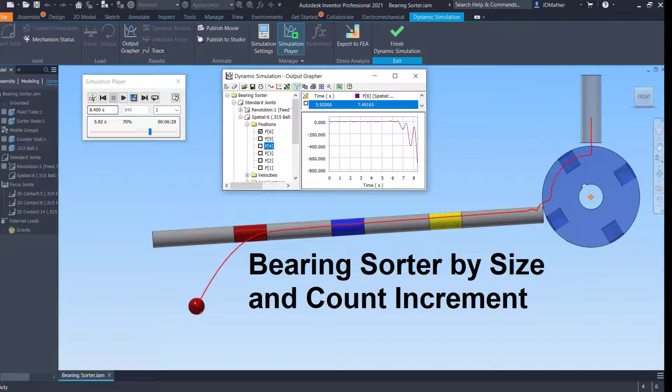Start a new metric part file, and then I'm going to go ahead and save this file, and I'm going to call it bearing sorter master. We're going to do a multi-body solid where we put several parts within a single part file, and we'll push that out to an assembly.

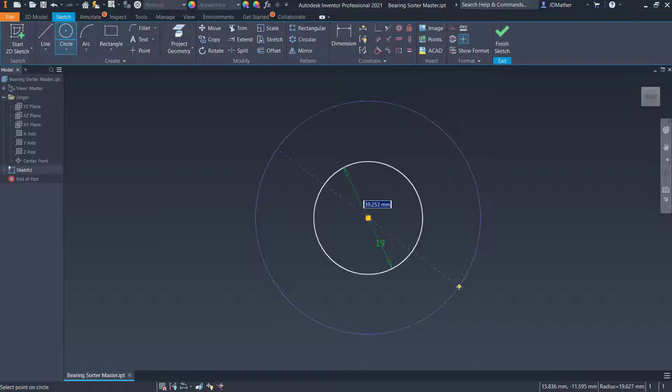I'm going to start a new sketch on the XY plane, and I will draw a circle with a diameter of 19 millimeters, and I'll draw a second circle at 76 millimeters. Then I'm going to draw a line from the origin up to the 12 o'clock position, and I will do a center point rectangle at this 12 o'clock position, making the width 3 millimeters and the height equal to the width.

So far all of this geometry is fully defined. I am then going to draw a construction line from this point up to the 12 o'clock position on this circle. I see it didn't turn dark, so I missed something, probably the vertical. Yes, I missed the vertical. Actually, let's do one more line.

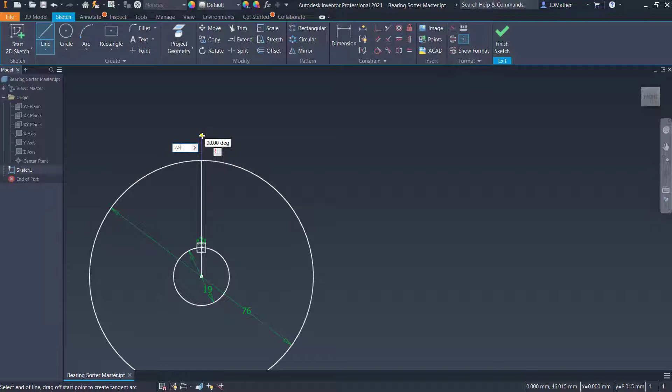So we'll do another line here, and for this line I'm going to make this 2.5 millimeters. Then I'm going to change these three lines to construction - this one, and this one to construction. And then I'm going to draw a rectangle, and I'll do this as a 2-point rectangle.

Let's do this as a construction rectangle, from here over to that, and I want this line in the center to be a center line type, so I'll have it as a construction center line. I'm going to dimension the diametral dimension from here to here as 13.2.

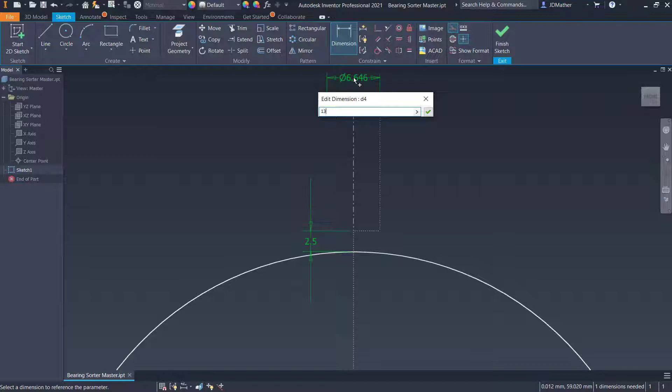I will dimension the height of this as 50 millimeters, and then I'm going to draw another rectangle, this one as an object line rectangle, from here, and I'll drag this point up to here, and dimension the distance from here to here as 1.5.

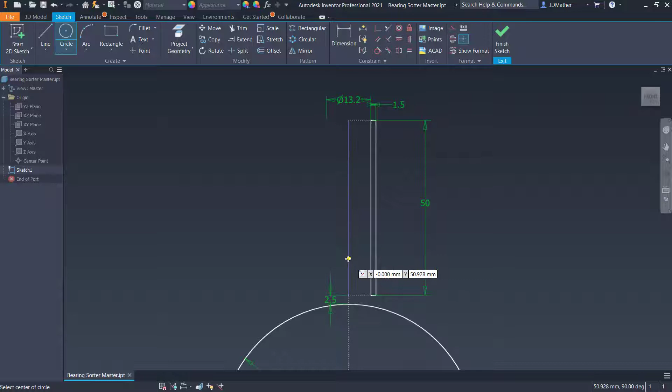And we're going to revolve this as a tube. Alright, I'm going to now draw a circle on this line, and I want it to come down to this point right here. Then I'm going to trim off half of this circle, but before I do that, let's go ahead and dimension this.

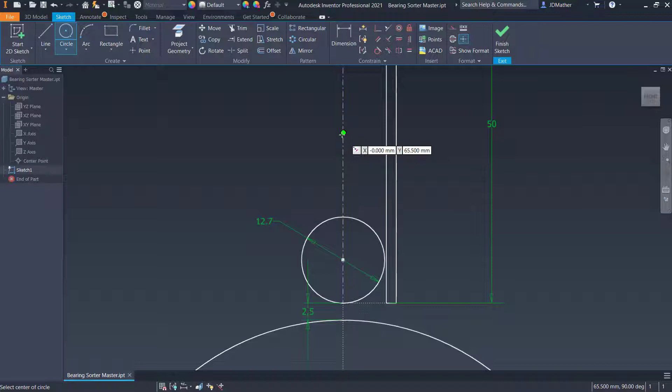So I'm going to dimension it as a diameter, and let's do this as 12.7. We see that there's a little bit of clearance between here and here. I'll draw another circle, and be careful you don't get the midpoint of this line - any place on this line except for the midpoint - and I want it tangent to this circle.

Now, it may or may not put that tangent in. It looks like I'll have to add that tangent, and then I will dimension the diameter of this circle as 13, and I'll draw one more circle.

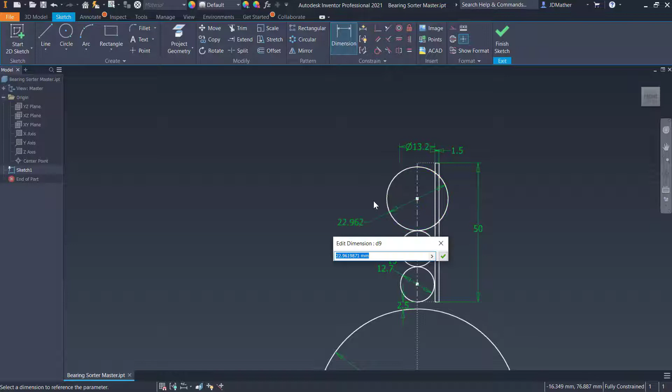I'm going to do this circle from here, and I want it tangent to this circle, and then dimension this circle as 12.4. So I made this one 0.3 less than this one, and this one 0.3 less than that one. So I have 3 different sizes, and I intentionally put those in alternate order rather than from smallest to largest or largest to smallest.

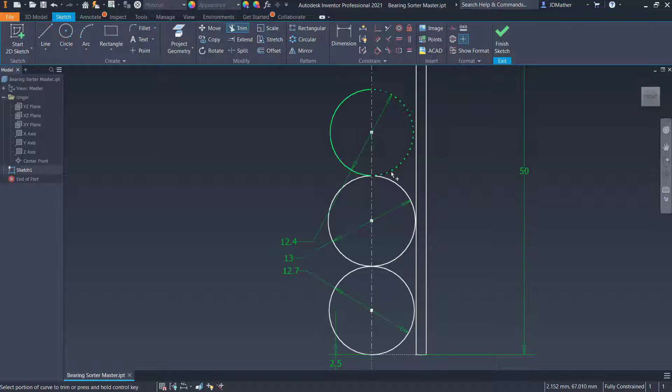I'm going to trim off one side of these arcs. Now, we don't really have to do this step, but I'm going to trim off one side of those arcs, and change this to an object line, so it will be an object center line. Then we're ready to start making some geometry with these sketches.

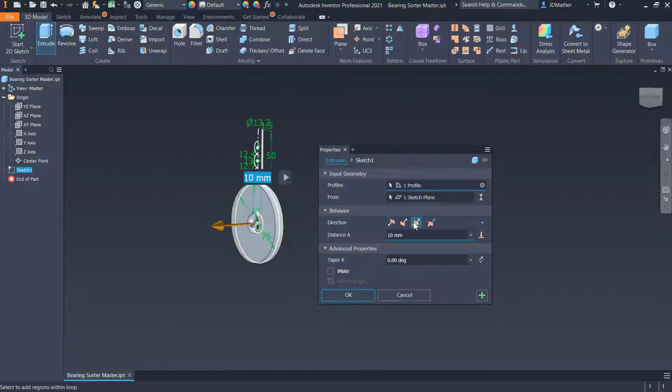I'm going to say finish sketch, and I'm going to do extrude, selecting this area minus the keyway. I'm going to go symmetric, and let's do this at a distance of 10 millimeters.

I want to put a plane up here at the tangent point, and there's several different ways I can do that - I'm going to do it this way. I'll turn on the visibility of that previous sketch, and do a plane at this point perpendicular to this line. Alright, let's hide that sketch for a minute, and I'm going to put a hole into this part, so I'm going to do a new sketch, and I have the origin projected.

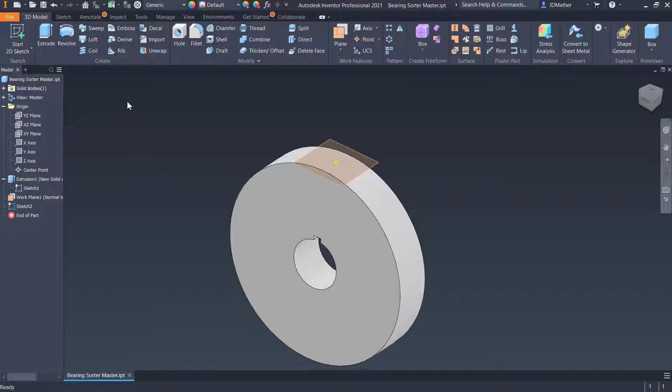That's all I want, is that origin, and I'm going to do a hole feature on this plane at this point. For the bottom of the hole I want a flat bottom hole, the diameter 13.5 millimeters, and the depth also 13.5 millimeters. We'll say okay to that.

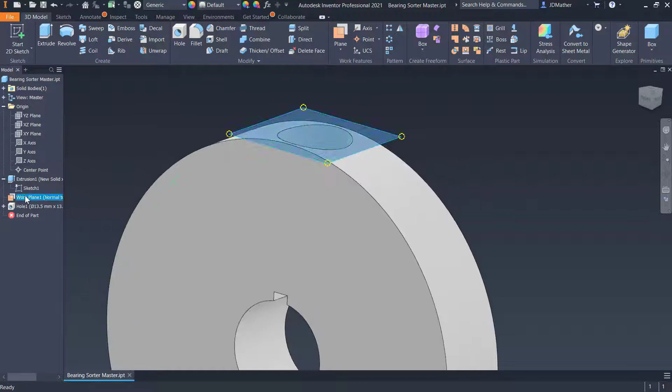Alright, so I have a hole in here. I'll turn off the visibility of this work plane, and I'm going to put a chamfer on here, but I'm going to do this two different ways. So I'll do a chamfer on here, let's do that, say 0.5 millimeters.

So we see that it puts a uniform chamfer going around this edge, but that isn't the way that the tool would really make this in the real world. So I'm going to do it more like it would show up in the real world.

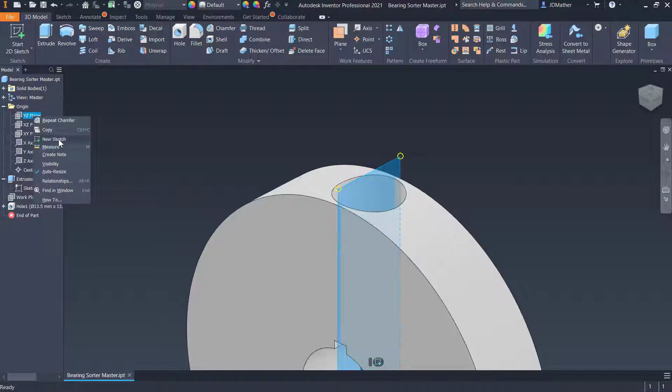I'm going to start a new sketch on the plane going through this, perpendicular to the XY plane. So I'll go to the YZ plane, do a new sketch, and project geometry this arc, then draw a line going over horizontally. In 3D it's vertical, and I'll go down at an angle and back up.

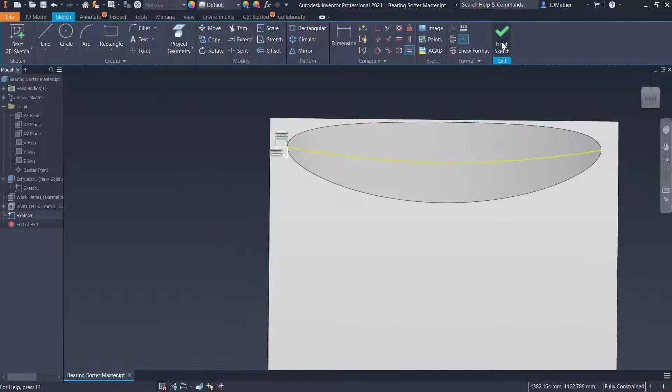Let's dimension this as 0.5, and I'm going to do equal, making this line equal to this line. It all turns dark, it's fully constrained. I'll then do revolve, revolving that around the y-axis, and put it on cut.

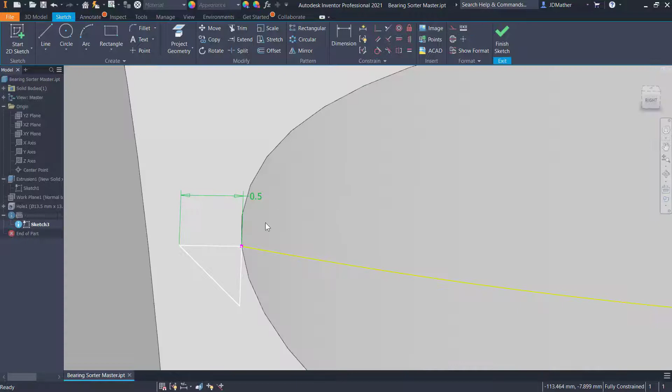Let's accept this and see if I can determine what the error was. I'm not sure why I'm getting an error. If I expand this where I see the eye, there's an issue indicated with that sketch. So I'm going to edit that sketch, and I see that this pink point indicates the projection point has been lost.

Let's hit F7 for slice graphics so we can see into our model. I'm going to delete this curve we put in here, and delete that line. It's a projected edge, so I need to delete this constraint on that point. Now this can be dragged anywhere.

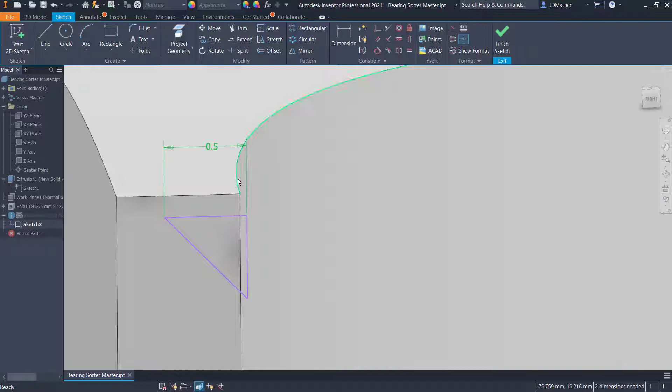Rather than project this edge, which turns into a spline, I'll do project geometry and instead get the edge of the circle, this line right here, then do coincident, this point up to here, and it turns dark again. I'll finish sketch, and it's still giving us an error, and I don't know why it doesn't like that sketch. It shouldn't be giving us that error.

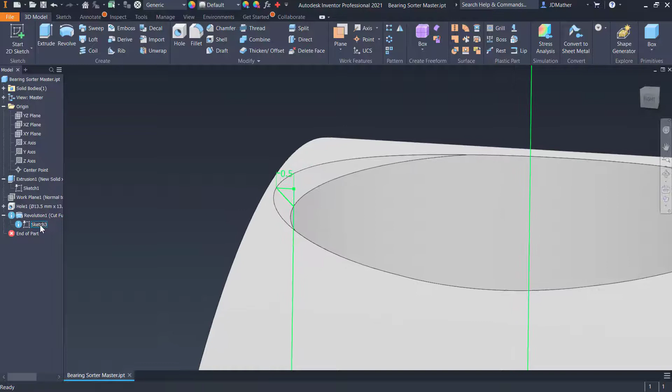So I'm going to delete this line, and delete that point, so that's free to move again. I think what I'll do is just project from the original sketch. I know that I have a dimension from here to here.

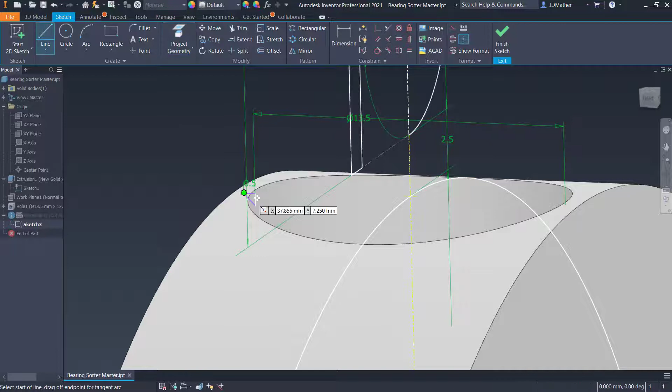Let's change this to a center line, and I'll dimension from the center line over to here. That's 13.5. Then I'll turn on the visibility of sketch 1, and project geometry this point right here, then draw a line from here over to that projected point.

If I drag this, I see that this line doesn't stay horizontal, so I'll need to put either a horizontal or vertical constraint on this. Now it's fully defined, and I can finish sketch.

So I don't know why it was giving us an error. It should not have given us that error.

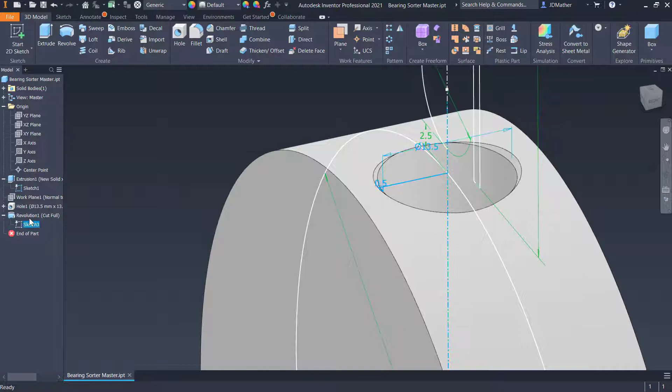I want to go a little bit bigger with my chamfer and the size of the cylinder, so I'll edit that original extrusion, and instead of 15 I'm going to do 20. On this chamfer I'll edit that sketch, and instead of 0.5 I'm going to do 1.5. We'll accept that, and that looks pretty good.

I'll save this, and then we can do the next body.

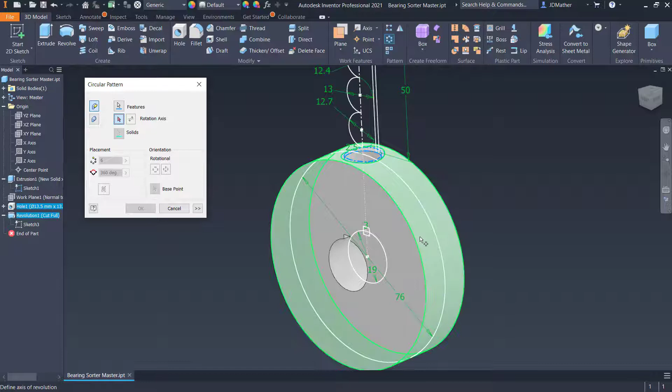I want to make 4 copies of this hole going around the disc, so I'm going to do a circular pattern, selecting the hole feature and this revolution that we used to put the chamfer on. Then I'll do it about the center of the disc, put 4 copies, and say OK. Now I have 4 holes going around the part.

I'm then going to revolve this, and when I do that, I'm going to do that as a new solid body. So right now we have one solid body, and we might go ahead and name this. I'm going to call this counter disc.

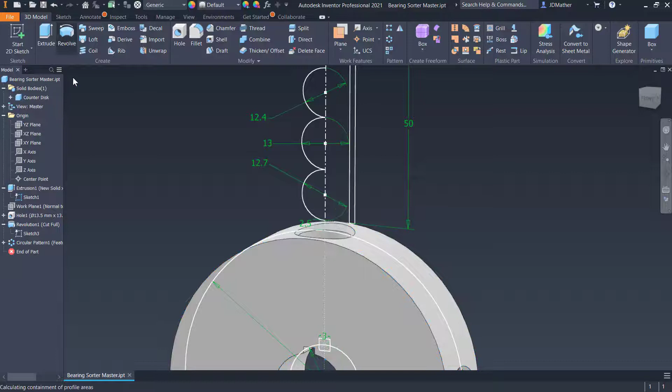Now I'm going to do revolve. I'm going to select inside of this circle, revolve about this axis, and I want to put this on a new solid. We'll go back and name this. Actually, let's go ahead and name this now. I'm going to call this 12.7 sphere, and then I'll revolve the next one.

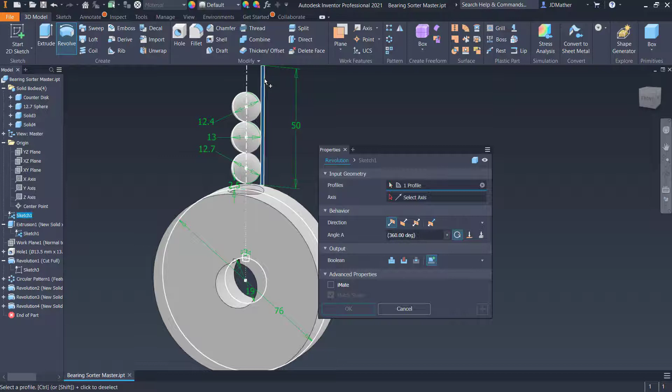I'll revolve this area about the axis, and we'll tell it new solid. I'll apply that, and then I'll get this one, revolve this about this axis, and I'll apply that. Let's go ahead and get this, and I'll revolve that about the axis, and we'll say OK to that.

Alright, let's rename the rest of these. So I will name this one as 13 sphere. I'll name this one 12.4, and I'll rename this as tube. Let's call it feed tube.

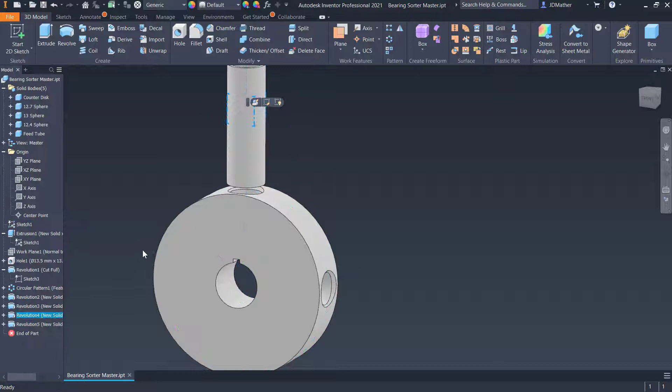I'll turn off the visibility of the sketch, and I'm going to change some colors on some of these components. So on the counter disk, I'm going to set that to be clear polycarbonate so I can see through that disc. I'm going to do the same thing on the tube, the feed tube, making it polycarbonate clear.

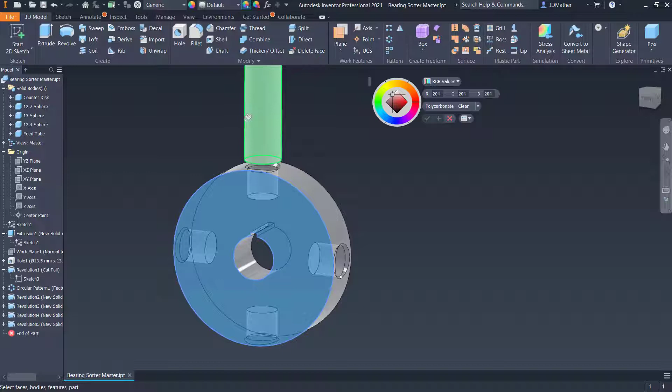Now what I could do is just click with the adjust and pick that up with the eyedropper, pick up that color, and then with the paint bucket drop it onto this component, and I thought I got it on there, but I didn't get it. Let me try that one more time. So we'll do it on the body. I'll pick up this appearance, and I'm going to drop that on the feed tube.

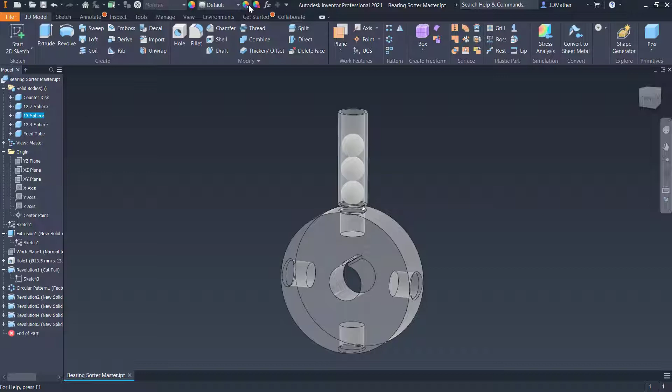There we go. And then I'm going to change the color of each one of these balls. I'm going to make the largest one red, or you can use whatever colors you want. For the smallest one, I'm going to make that one green, and for the middle sized ball, I will make that one yellow. Alright, so I have 3 spheres, 3 different sizes, and 3 different colors.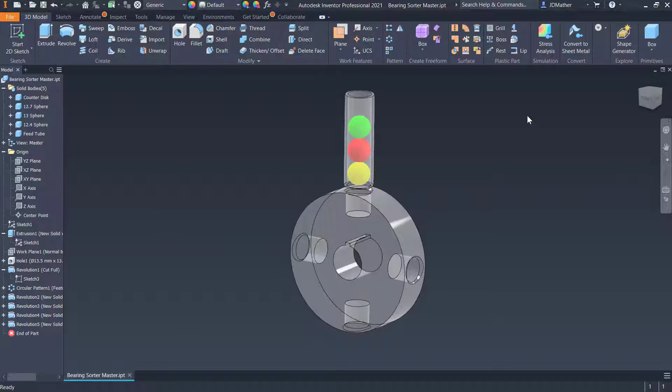I'll save my master file. I'm then going to go around to the front view, and I'll do a new sketch on the XY plane, and I will do a construction line going over from the origin, and I will then go down vertically, and I'm going to come back at an angle like that, and then I'll come up vertically about like that.

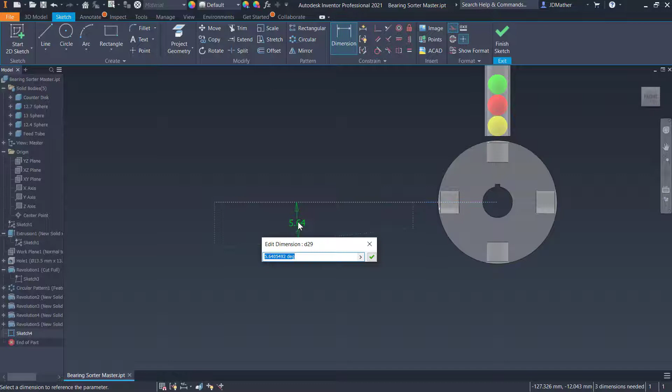I will dimension the angle between these two as 3.5, and then I will dimension the aligned length of this line as 305, and then I'm going to dimension the length of this line as 13.5, and I will dimension the overall length of this line as 340.

I'm going to create a work plane through this line perpendicular to the XY plane. So I'll do a plane, I'll select that line, I'll select the XY plane and put it in at 90 degrees. And so I have this plane now.

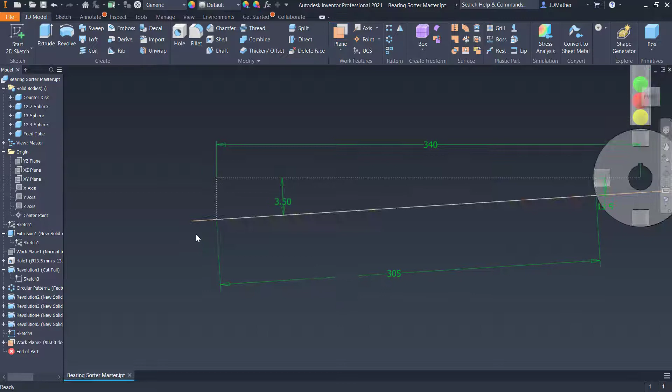I'll turn off the visibility of this sketch, and actually before I do that, I'm going to project this line. So I'll start a new sketch on this angle plane that I put in, and I'll project geometry, and I'll select this line, and then I'll turn off the visibility of the previous sketch.

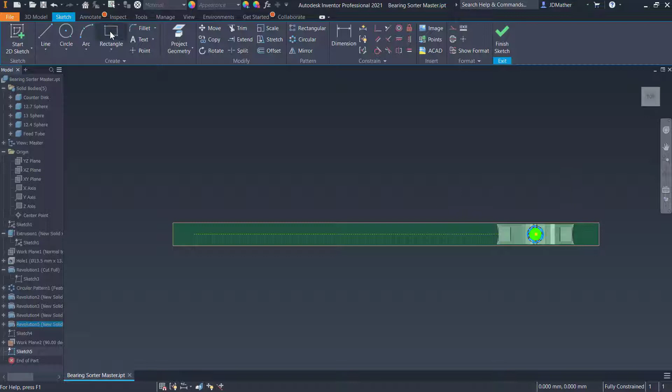And I'm going to go to the top view, and I'm going to draw a rectangle, and I want this to be a 3-point rectangle, and I'm going to draw it something about like this, up and about like that. I'm going to change this line to a center line type, and I'm going to dimension the diameter from here to here as 13 millimeters. And when I did that, it shrunk this down, so I'm going to drag this back about like that.

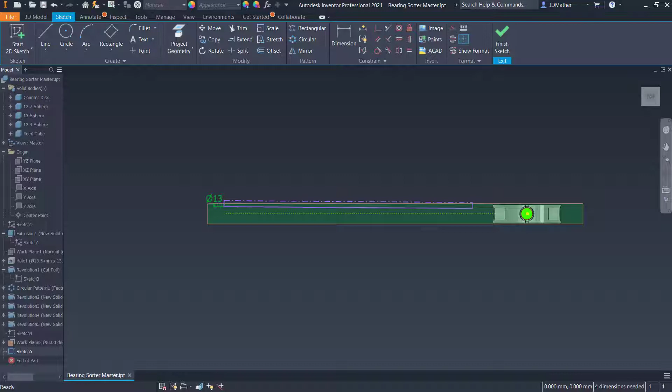And then I'm going to do a circle. I'm trying to decide where I want to put this circle. Let's do a line from here to here, and so I'll do a vertical line from here up to here, and I'll change this to a construction line.

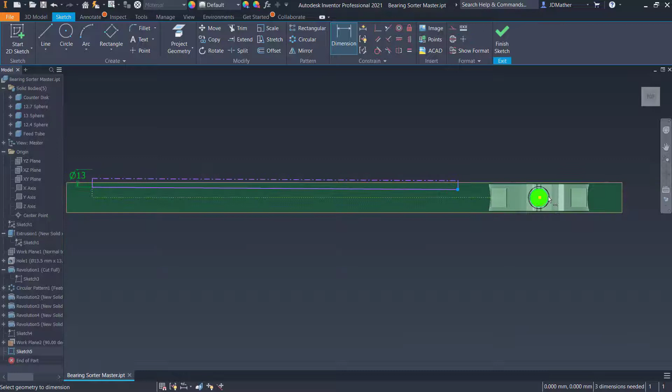And then I'm going to do a dimension from here back to the origin, and I will do that as 40 millimeters.

And then I'm going to draw a circle on the midpoint of this construction line, and I'm going to do that circle as 12.7. And I'll draw another circle over here, and I'm going to do this circle as 13.

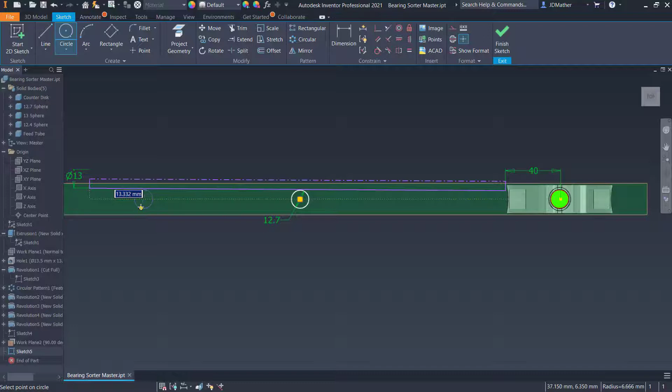And I'm going to do tangent this line to this circle and this line to this circle. So there's a slight angle going down across here.

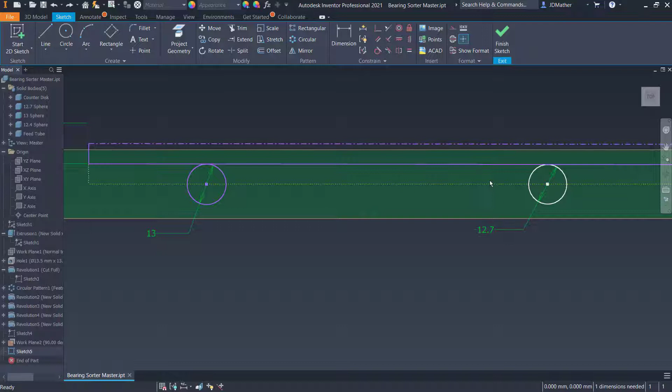If I try to drag this geometry, we see that circle can move, so I'm going to do this. Now I did this one at the midpoint of this line, so it can't move. I'm going to put the distance between these circles from here over to here as 76.

And then I'm going to draw another circle, and I'll put this circle over here, and I'll do a tangent, and I'll dimension this also as 76 from here to here.

Now I can check the radius or the diameter of this. It should be 12.4. So let's dimension this, and we see that it is 12.4.

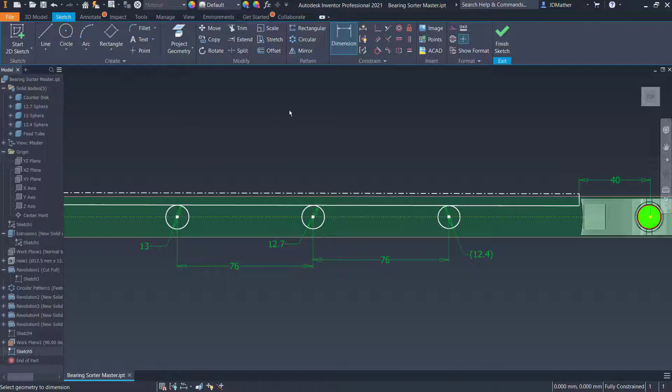I'm going to change these 3 circles to construction, and then I'm going to do a rectangle, and I'll do this as a center point rectangle here, and I'll do another one here, and another one here.

And I will make the width of these rectangles equal, so that's equal to that, and this is equal to that. Also the height, this is equal height to that, and this is equal height to that.

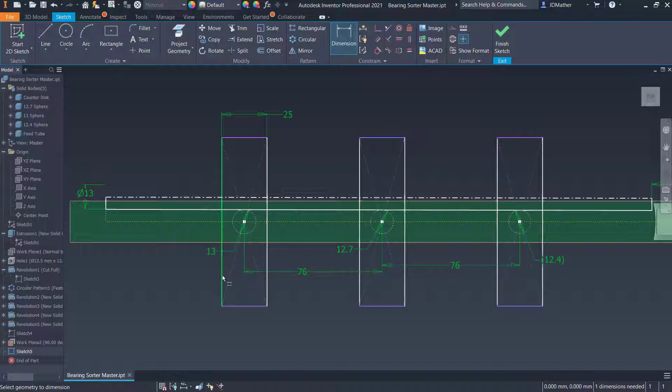I will dimension the width of this rectangle as 25, and I will dimension the height of it. Now the height doesn't really matter, just so long as it goes through this sketch if that was revolved. So I'm going to do that as 90.

We see all of our geometry changes color to indicate that it is fully defined. I'm then going to draw a line from here over to here and a line from here over to here.

I'm going to change this line to construction, and I'll change this line to construction, and I'll also change this. So what we have now is a zigzag going down, over, up, over, down, and so forth.

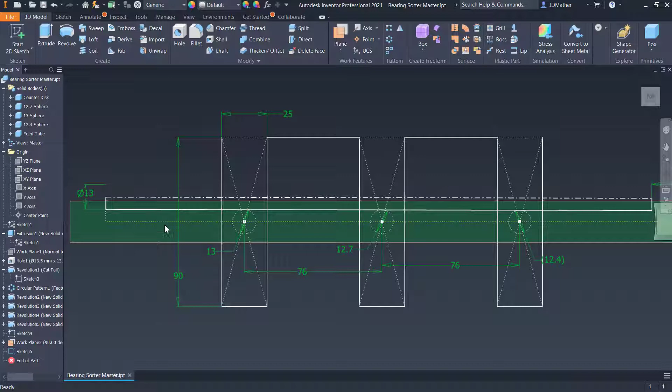All right, I'll finish this sketch, and I might have done that on two sketches, this rectangle and these as a separate sketch, but I'll go with what I have. I'm going to do revolve, and revolve this rectangle about this center line, and I'll tell that to create a new solid.

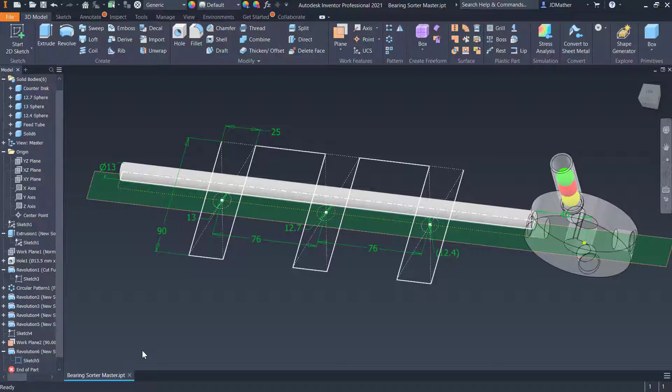I'll turn on the visibility of that sketch, and I see that there's no thumbtack indicating that it's fully constrained, so I want to find where it isn't. I'm going to edit that sketch and turn on the degrees of freedom, and I don't see any red arrows indicating that anything is free to move, but for some reason Inventor's not seeing it as a fully defined sketch.

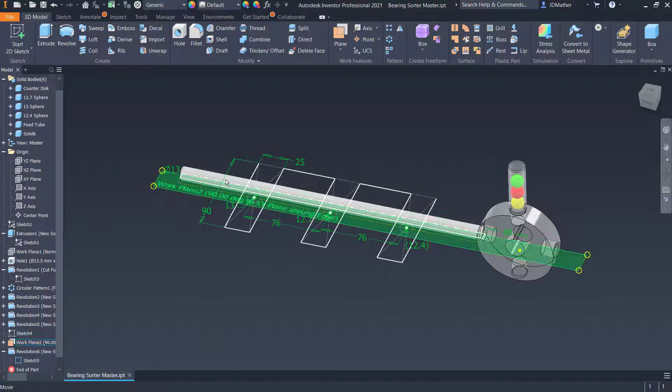Now I'll finish that sketch, and I'm going to do a split of this face. So I'll do split, and I'm going to select this as the face that I want to split. I actually need to select the splitting tool first.

So I'll select this curve, and we see that it goes back and forth across here, and then I will do the face I want to split. I'll say okay to that.

I'll hide my sketch, and I'll hide the work plane, and then I'm going to temporarily hide this tube. So I'll go to the feed tube, right click and turn the visibility off on the feed tube, and I'm going to put a color onto this solid body.

So I'll go to the properties of that solid body. I'll make that a chrome color, but I want this area and this area and this area to be different colors. Remember that our largest ball will be out here.

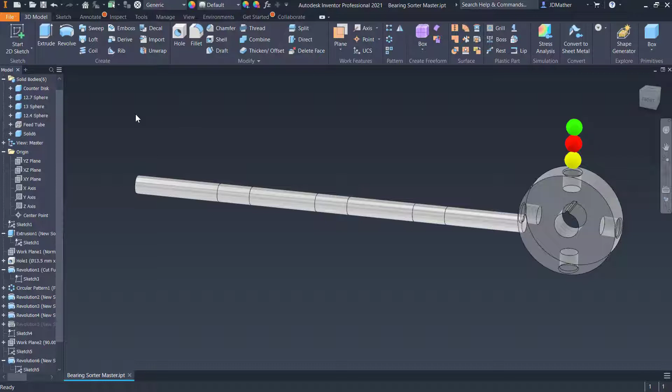I could just turn on the visibility of sketch number 5 to see those dimensions again. So the 13 is the largest. So I want this color out here to be the red.

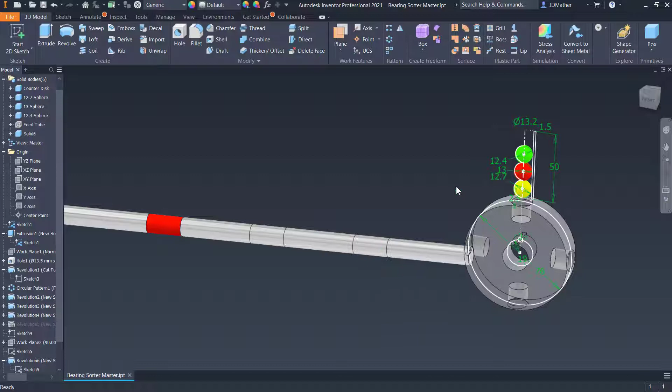I'll do adjust and pick up this red color with the eyedropper. I'll click here with the paint bucket to paste that, and then I want the smallest color to be down here, so I'll do adjust again, pick up that color, then one more time I'll adjust and pick up the yellow color, and drop that at that location.

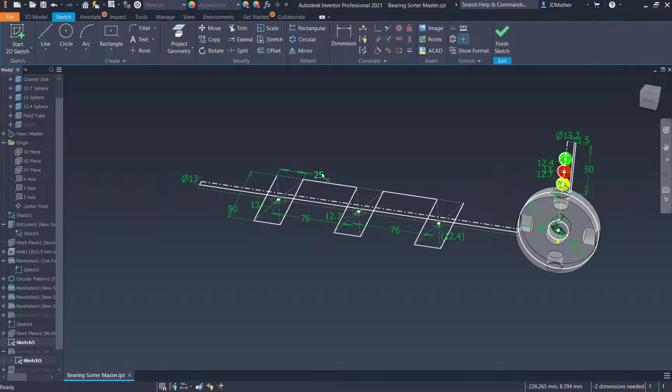Now you may need to adjust these widths. That is fairly narrow, I think I'll increase that a bit, so I'm going to edit this sketch. Instead of 25, I'm going to do 30, and I might even increase it beyond that, but I'll go with that for now.

And I want to mirror this rod to the other side. Now in reality it would be 2 rods, but we're going to treat these 2 rods as a single body. So let's go ahead and rename this - I'm going to call this sizing rods.

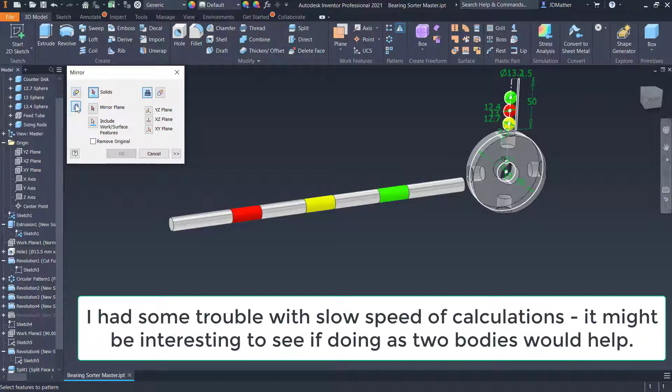And then I'm going to do mirror. I will select the body to mirror, so I'll do mirror solids. I'll select this solid body to mirror, and I'm going to leave it on join, and the mirror plane I'll select as the YZ plane, and we'll say okay to that, and so that mirrors that body to the other side. I'll turn off the visibility of my sketches, and turn the visibility of the feed tube back on.

I'll save my master file. So we have a master body file with all of our solid bodies within one part file.

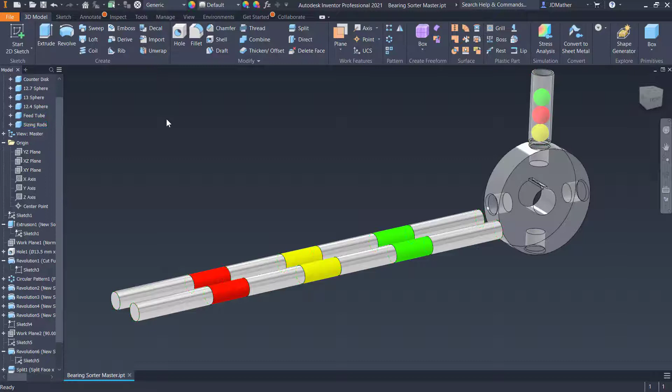I want to send those out or push those out to an assembly, so I'll go to the Manage tab, and I'm going to tell it to make components. I will select these solid bodies, make sure that I have all of them, and then I will put those into bearing sorter, and I'm going to get rid of the master - the master was our multi-body solid.

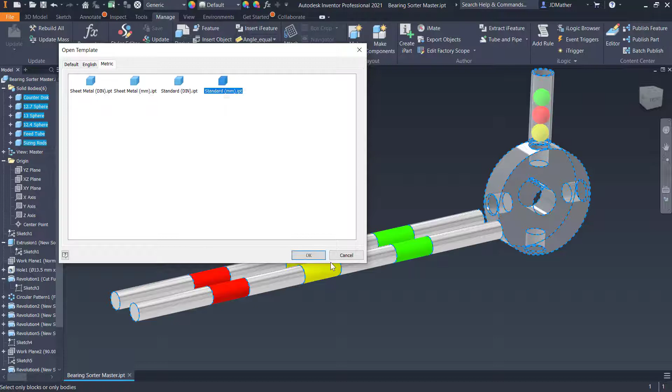For the standard I'll use a metric template, and I'll make sure it's going into your project, and I'll select next, and then I want to use a metric template for each one of these as well. So I'll do a standard millimeter, and I think we can get all of these. I'm not sure, I'm going to hold down the shift key and see if I can get all of those at the same time. Okay, so we see that it's going to use a metric template to create those, and I'll say OK to that.

So now I'm in an assembly file. The feed tube and these rods, I'm going to leave those as grounded. So I'll move the feed tube up to the top, and I will move the sizing rods up to the top, so those 2 components will be grounded.

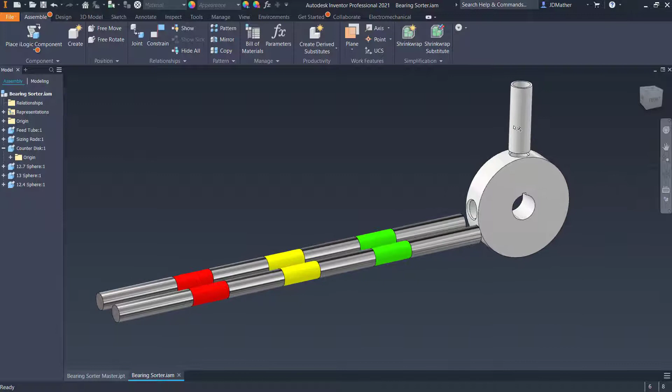I can put an appearance on this. So we lost the clear appearance going from the multi-body solid. I'm not sure if there's a way to avoid that or not - I didn't pay attention when I did the multi-body solid. I think there is a way, but I didn't pay attention to it.

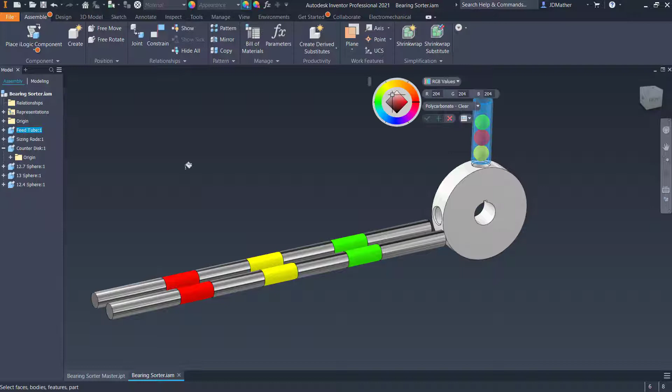I'll do this as polycarbonate clear, and see if I can pick up that appearance and drop it on the counter disc. And so now that one is polycarbonate clear.

It might be best if we went into a section view, but before we do that, let's get the other components constrained. So I'm going to unground the counter disc, so now this can move anywhere.

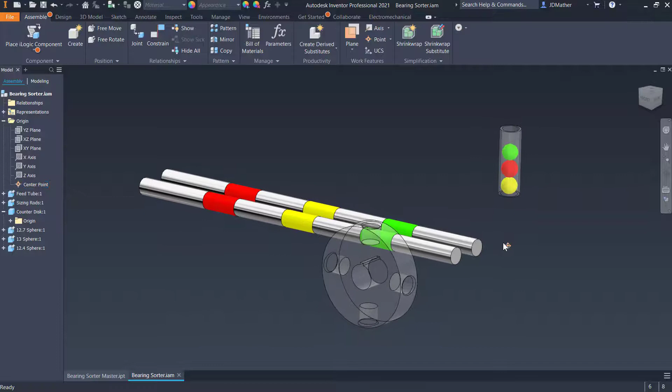Let's turn on the visibility of the origin, and I'm going to attempt to put a joint between the midpoint of this and the origin. I'll expand the origin of the counter disk.

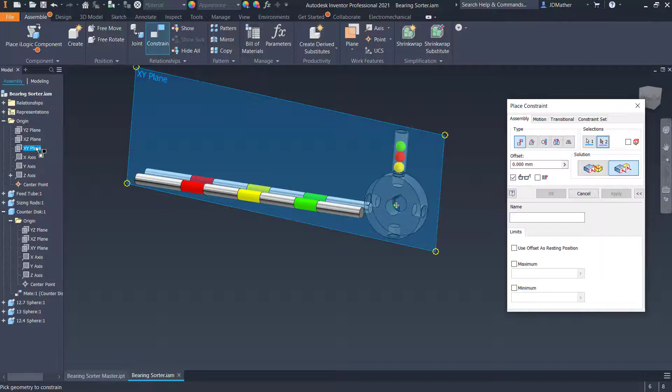I'll have the origin of the assembly visible, and I'm going to do constraint, and I'll do the z-axis of the counter disk to the z-axis of the assembly, and then I'll do flush the XY plane of the assembly to the XY plane of the counter disk. And so now this should revolve.

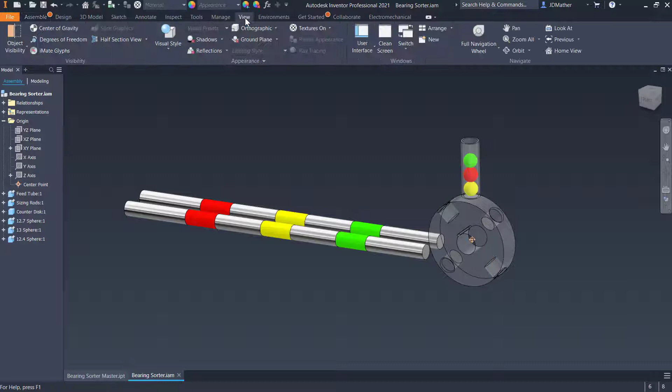We see that it does, and I'm then going to go into a section view. But first, let's unground these balls, and I think we can just leave those grounded in their position where they're at, so we'll check and see. So I'm going to go to view, and I'll go to half section view, and I'll select the XY plane.

Alright, then I'm going to go to dynamic simulation, so I'll go to environment, dynamic simulation, and I need to get the 3 spheres out of the grounded group, and so we need to add a spatial joint to get those out of the grounded group.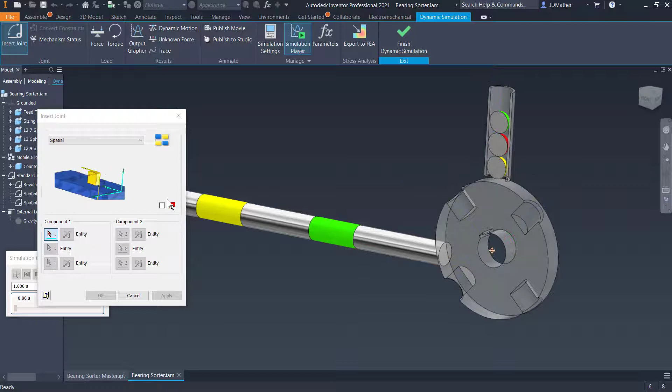So I'm going to do insert joint, and I'll do spatial, and I'll select one of these spheres as my first component, and as my second component I'll select this cylinder. I'm tempted to select the body that doesn't move, but it shouldn't make any difference, so I'll apply, then get the second sphere and the second component, apply, and the third sphere and the second component. I see these are still in the grounded group, so we'll right click and unground each one of these.

Okay, so now those 3 spheres are in the mobile groups, and then I will do a 3D contact between this sphere and this cylinder. I will do a 3D contact between this sphere and the rods, and remember we did the 2 rods.

We're in a section view right now. We did those as one solid body. I'll do a 3D contact between the sphere and this tube, and then we need to repeat the same operations with this ball.

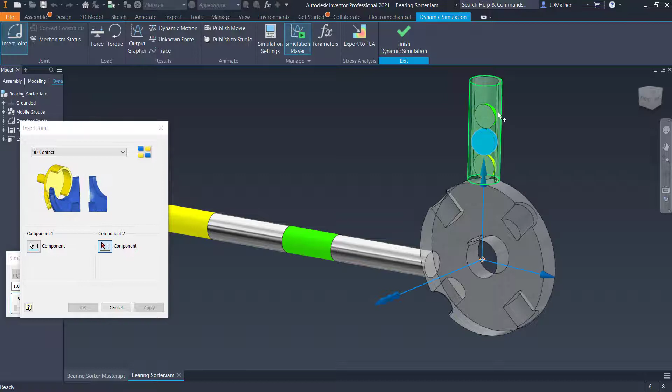So I also need to do a 3D contact between this ball and this ball, and then a 3D contact between this ball and the tube. I need to do a 3D contact between this ball and the counter disc, and between this ball and the rods.

And a 3D contact between this sphere and this sphere, between this sphere and the tube, between this sphere and the cylinder, and between this sphere and the rod. So I think we have all of our 3D contacts on here.

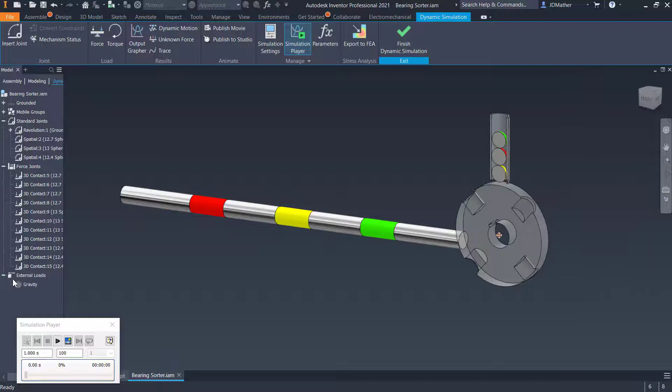Now we may need to make some adjustments on these 3D contacts, but for right now I'll leave those on the default. And then I also want to define gravity, and I'll set it to be perpendicular to this face. I want gravity to go in that direction.

I will finish dynamic simulation for a moment, and I'll leave section view. So let's go to view and section, and then we need to drive this cylinder. So let's go back to dynamic simulation.

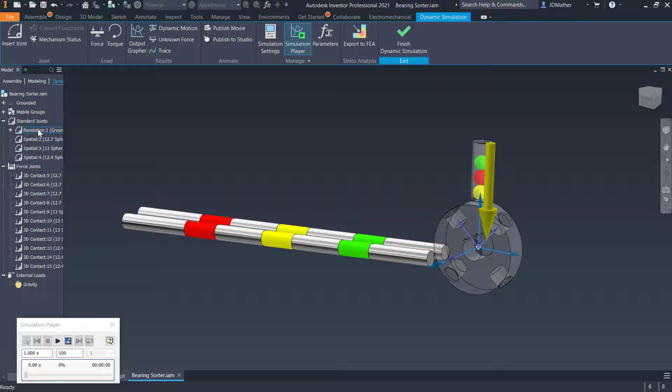I'll find that revolution joint, and I'll go to properties, 1 degree of freedom, revolution, and I will do the impose motion, enable impose motion. I'll do a constant velocity, let's say of 360 degrees per second.

I'll go to my player, and I'm going to increase the number of calculations, so let's do 5,000 calculations, and I'll change that time. I'm not sure how long it'll take. Let's take 5 seconds, and we'll save this and then play our simulation.

So I'll play. I'm doing 5,000 calculations. That may be too many. I might try to decrease that. So let's stop this and try to decrease this, and we'll do 500.

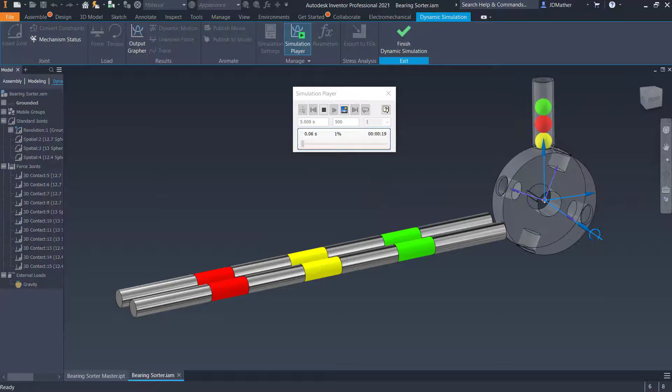Now if we get too few calculations, we can miss a contact between the balls and one of the other components. I had a lot of trouble with this working correctly if I had all 3 balls in here. I've got it to work in the past, but today for some reason it doesn't work correctly with all 3.

But if I do one at a time, the operation I'm expecting to see is this ball goes down into the hole and it falls through here. Now because it's up here rather than down here, it's going to miss that first hole, but we'll go ahead and play it. So it didn't quite fall down far enough to get into that first hole, but it will then ride around on the counter disc until it gets to the next hole, and this one it has time to fall into that hole, and then it will continue on around.

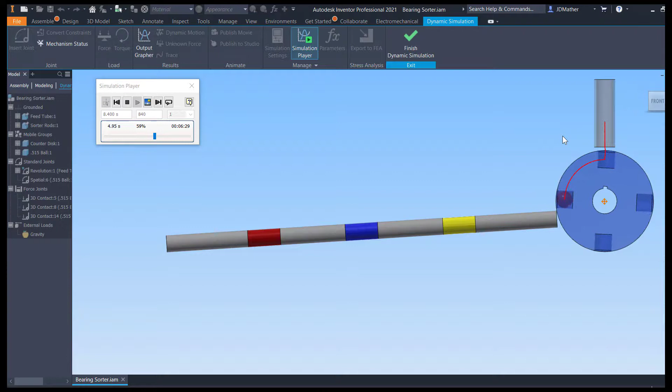So this could be a way of counting the number of balls that you have, and also a way of sizing them. So when it rolls down, the distance between these two rods gets greater and greater, and so it should fall through that red area.

And so you could use this as an inspection device or sizing device for clams, for potatoes, for apples, fruit, whatever you need to count and size.